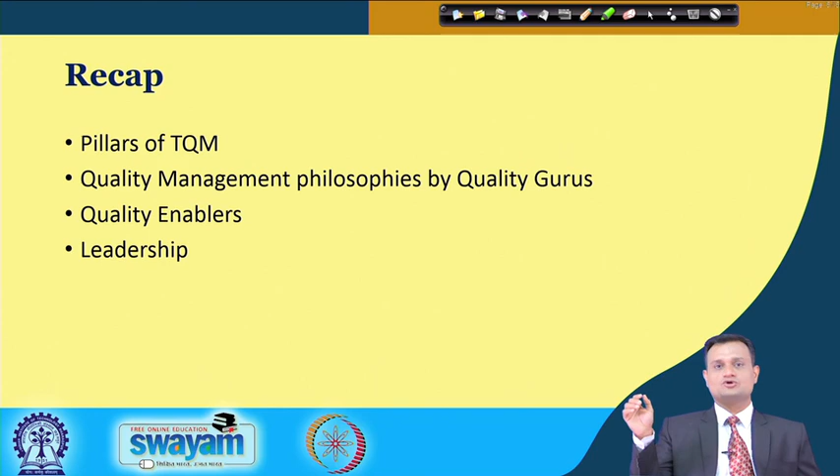Before that, let us just try to have a small recap. We have basically talked about pillars of TQM in last lecture. We have seen the quality management philosophies and principles extended by various quality gurus, quality enablers, and what is the prerequisite for implementing continuous improvement program like Six Sigma, and what is the difference between leadership and management, and how leadership at every level in the organization can play a great influential role in building the quality culture.

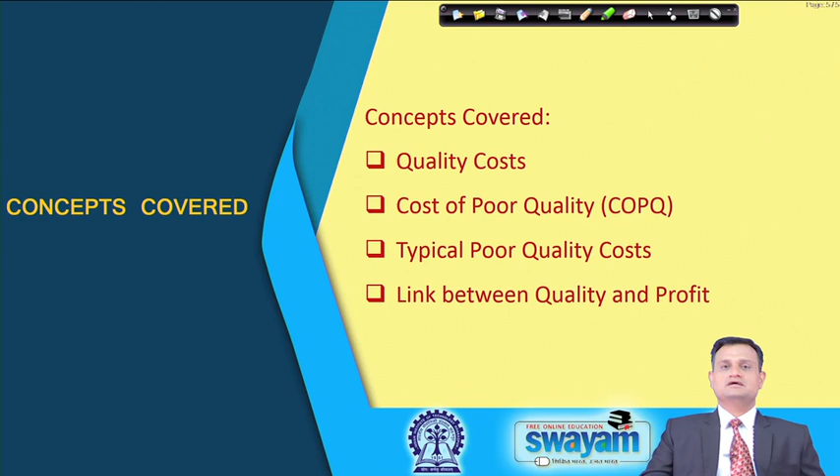So, with this let us try to continue in our journey, and this lecture will basically focus on quality cost, cost of poor quality, typical poor quality cost, and link between quality and the profit. So, these issues will help you to appreciate that any organization, service or manufacturing, by not putting their efforts for achieving the better quality, how much they are losing and what is the rupee or dollar cost associated with this.

So, to begin with, I would like to refer a very good quote given by Don Davis, president of Allen Bradley Company. He said that the driving force behind productivity today is not working faster or working cheaper, it is working together. So, this is the spirit we have seen as a part of TQM, and quality is the responsibility of everyone. It must empower the people, motivate the people to participate in a team based work and achieve the higher quality standards.

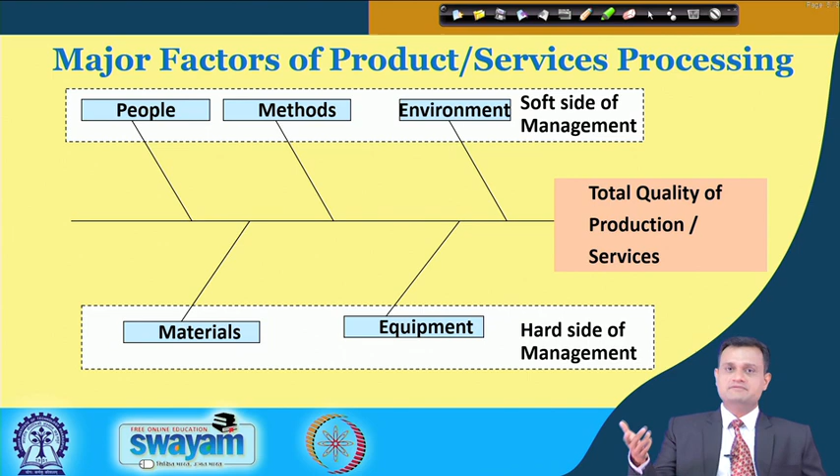Now, let us see the major factors of product and services processing, and these factors could be divided into two broad categories. Number one, soft side of the management, and another is hard side of the management. So, when you talk about total quality of product or services, you can see that environment, people and methods, this may be put together as a soft side of the management, and equipment, material, this is hard side of management. So, it is important for an organization to integrate these two in order to realize the benefit of quality in terms of cost and see that perpetual sustainable quality improvement can be implemented in the organization.

So, commitments for the organization to consistently produce conforming products. The moment you produce defective product, non-conforming product, you are basically adding the rework or scrap, and this leads to hidden factory and the cost. So, we want to achieve a desired standard product or service which meets the customer requirement and satisfaction, and for that I want to produce the conforming products. Quality is basically the conformance to requirement, not just goodness. I may be producing fantastic product, but this product does not meet the necessary requirements of the customer or market, then it is not conformance to requirement.

The requirements are often measurable, and the system of causing quality is prevention, not the appraisal. I would like to emphasize heavily on this third point, that the system of causing quality is prevention and not the appraisal. So, if you spend 1 rupee, $1 on prevention, then your appraisal cost, including your inspection correction cost, can drastically be brought down.

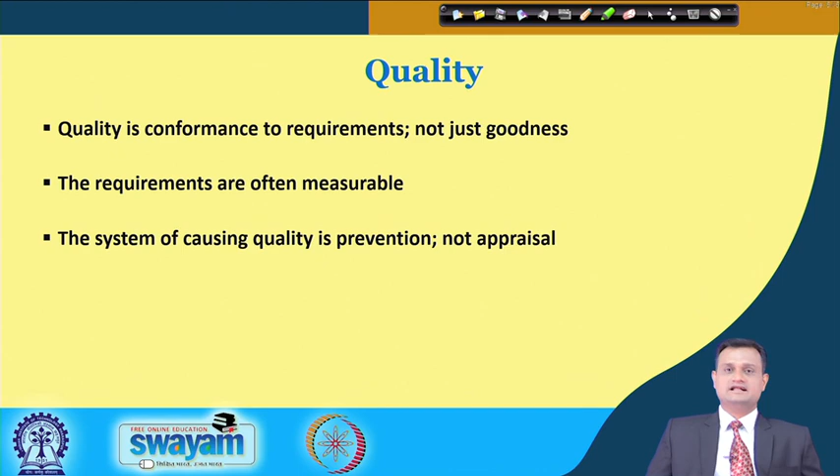So, with this let us try to see the broader categorization of quality cost. There is cost of conformance and there is cost of non-conformance. So, typically I would like to put prevention cost and the appraisal cost as a part of cost of conformance, and cost of non-conformance, it is internal failure cost as well as external failure cost. So, in the first case I am trying my best to see that I can meet the stipulated requirements, I can conform to those requirements, and in my pursuit of doing so I will have to accept prevention cost and appraisal cost. Second is cost of non-conformance. My product is non-conforming either in terms of performance or requirements, then I will have to accept the internal failure cost. This may be related to rework or scrap, and there would be external failure cost.

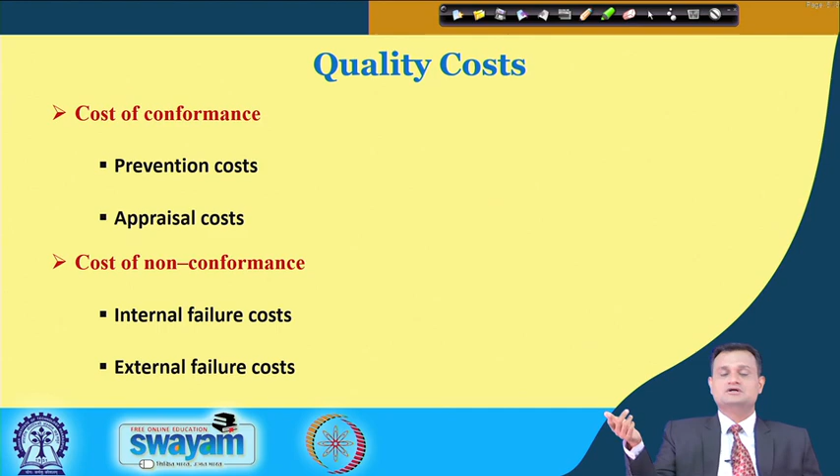So, my product is not satisfactorily performing or meeting the customer requirement when it is handed over to the customer. So, we will see the detailed classifications and the various costs we as a company will have to incur for cost of conformance as well as for cost of non-conformance.

There could be other quality costs difficult to quantify. Many a times you cannot realize how the quality not meeting the customer requirement and market is slowly and gradually damaging the company. This may be reflected in the shrinking market share, but such realization may be slow, and gradually you will see that many best organizations are thrown out from the market and their sustenance was at stake.

So, loss of customer goodwill, low company profile, reduction in market share, low workplace employee morale, these are some of the hidden intangible factors that you may not immediately realize, but gradually it will have a long term impact on the organization and your overall sustenance or profitability of the company will be at stake.

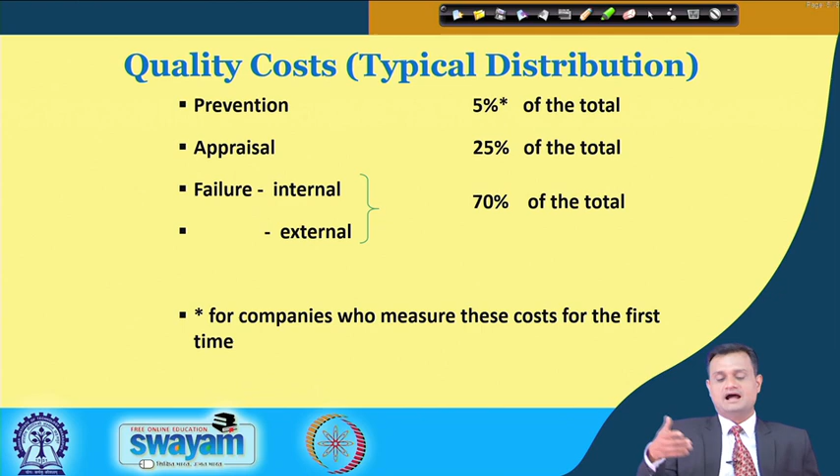So, just see this quality cost, there is a typical distribution. It may vary from company to company, but in general prevention, if you really spend wisely, is 5% of the total. For companies who measure this cost for the first time, appraisal is 25% of the total, and failure, internal or external, 70% of the total. So, in totality this is the typical distribution of your quality cost, and in order to produce conforming products, or products which can meet the customer requirement, I may spend my money on these different components.

Now, COPQ, cost of poor quality, is the expense of doing things wrong. So, here the concept is that you measure what will happen if I do not do things rightly. It means if I am not meeting the customer specifications, requirements and quality standard, what exactly damage I am accepting, and if you really measure this, you can better sensitize the top management as well as the people for achieving better quality standards.

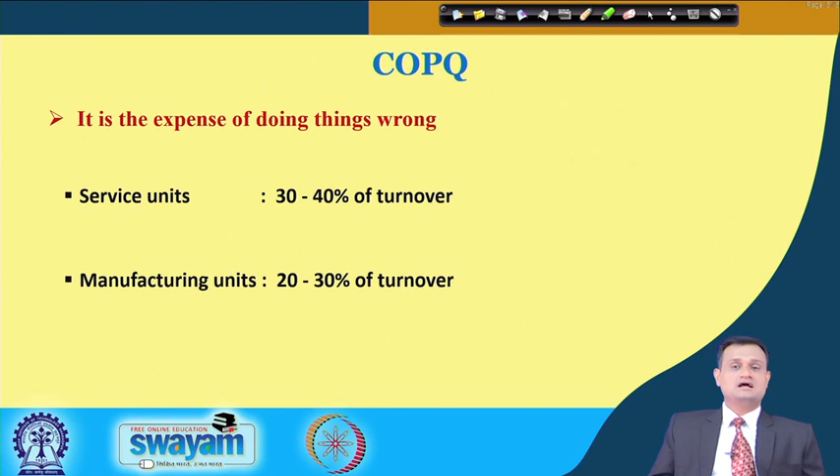So, in service units it is 30 to 40% of turnover, that is the cost of poor quality, and in manufacturing units, 20 to 30% of the turnover. If you convert it into monetary terms, you can really get sensitized to what exactly you are losing, and spending little money on training, prevention, or continuous improvement programs would be much rewarding.

So, in typical poor quality cost, there could be various types of cost within a category of prevention, appraisal and so on. So if we see the prevention cost, then job related training for employees. We are enhancing their skills and through that they are becoming more competent in executing their task. So it's a prevention cost. Their mistake level, error level will go down.

Customer interface to understand expectations. Very important. Organization and the customer should not behave as separate entities. Let there be proper marriage. Let there be proper collaboration between customer and the organization, and this interface can help the company to appreciate what to produce, what to provide and what not.

Technical manuals provide the guidelines to the people in executing their task so that they stick to certain standards, operating procedures and don't make mistakes. Early approval of product specifications. Many a times you undertake the production and still you are not final, from the client point of view or R&D point of view, about the specifications, and this is quite dangerous. So early approval of the product specifications from R&D, manufacturing and, most important, the customer can help you to realize better products and services.

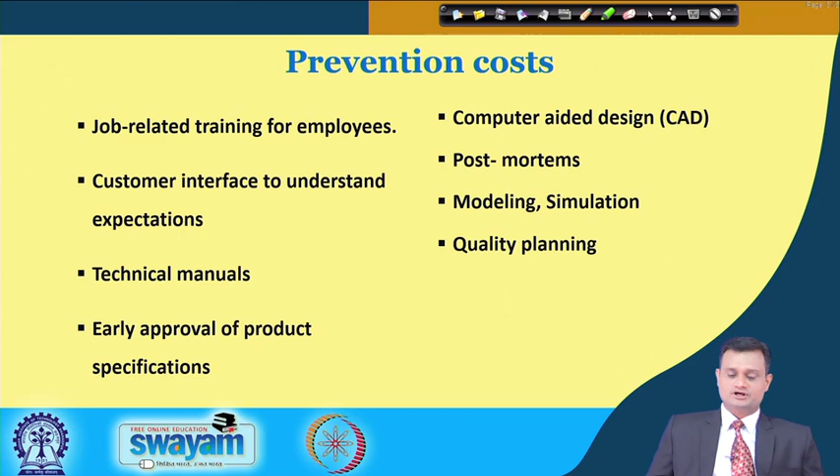Computer aided design and also simulation can save a lot of cost before you actually go for real life production. And quality planning. Another component that we may appreciate as a part of prevention cost, the most important, is preventive maintenance of equipment. So we always talk about the philosophy of total productive maintenance, TPM, and TPM emphasizes empowerment of the people for doing the maintenance of their own equipment and becoming more proactive in keeping the instruments and equipment up to the mark with better efficiency to carry out the production.

Quality systems, procedures and standards: your quality manuals must be up to date and must be properly communicated to the people so that they stick to the company wide accepted standards.

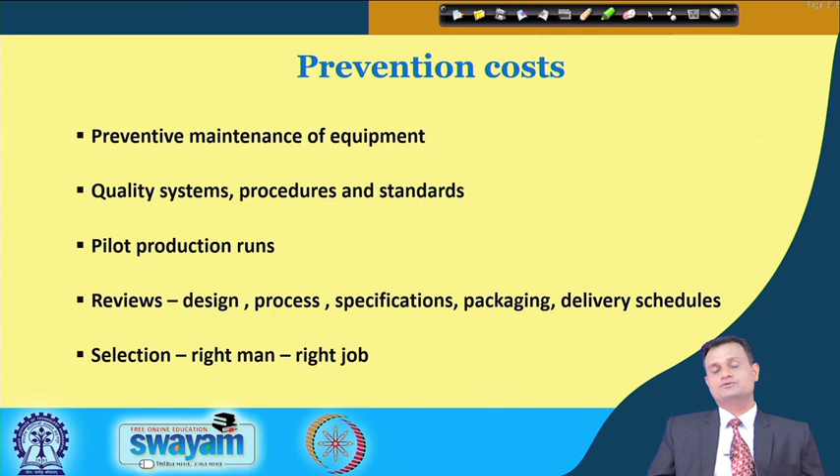Pilot production runs, reviews, design, process, specifications, packaging, selection, right man, right job. So as I mentioned in lean, the eighth waste is waste of unutilized human competence or potential, and we should try to minimize this component also.

Prevention cost, you can see there are many areas where if you just spend a little bit, you would avoid inviting many troubles later on. So surveys to detect changes in customer expectations. See, customers are exposed to a lot of products, varieties, brands, and it is extremely difficult to expect that my customer will stick to the same expectation. So in the dynamic environment, from time to time you should keep track of changing customer expectations and see how you can modify your existing product and features to meet the new customer expectations.

Process machine capability indices and studies. We will see these in detail. So many a times with aging, wear and tear and use of the equipment and machinery, their process capability has gone down, or because some parameters are disturbed it has got a little bit lower, and this study helps you take necessary action on equipment and machines to keep them up to the mark.

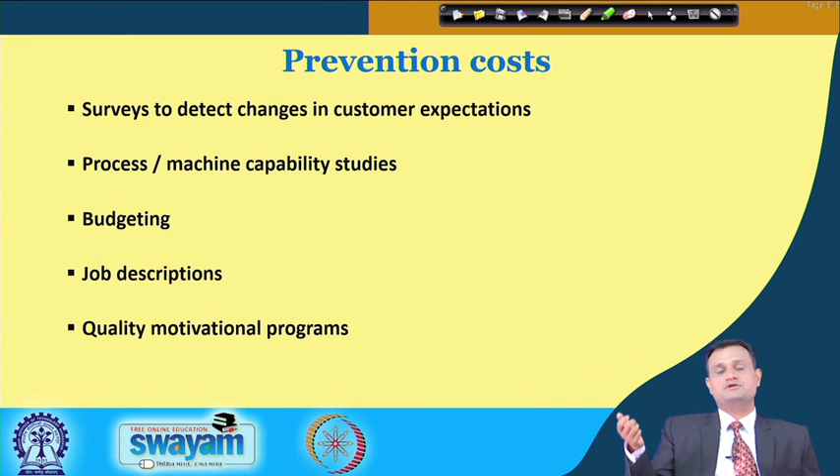Budgeting, job description and making people comfortable for their task, quality motivational programs and continuously seeking the commitment of the people. So this was a detailed list of various types of initiatives that you can take as a part of prevention.

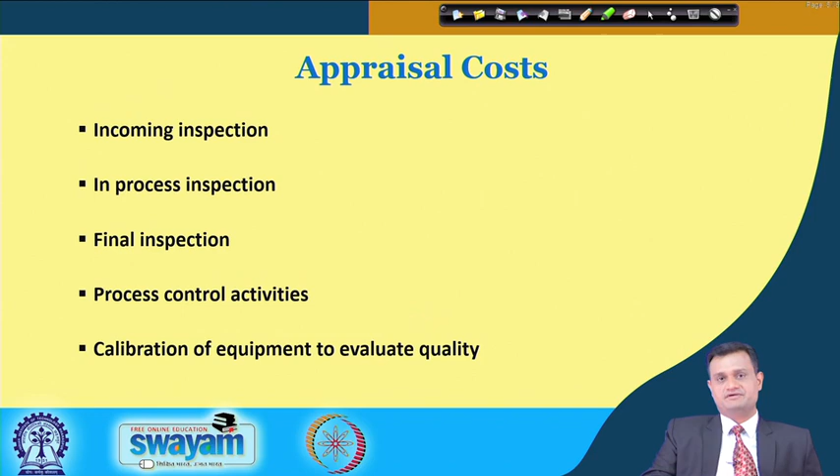Now let us see the appraisal cost. I am receiving the material, there could be incoming inspection. So remember, inspection is not bad, but inspection is a wasteful activity which does not really add any value to my product. There could be incoming inspection, in-process inspection, final inspection, process control activities like control charts and others, and calibration of equipment to evaluate quality. So there are various appraisal costs that also add to my COPQ domain, and if I spend a little bit more on prevention, then appraisal cost can be minimized.

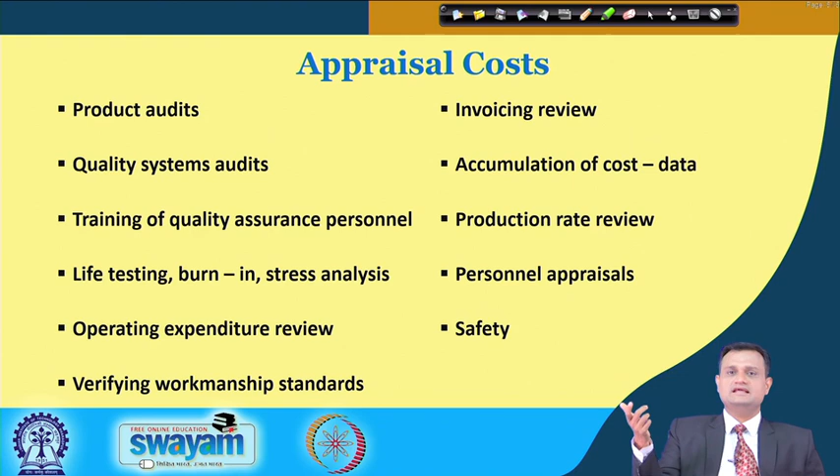So product audits, quality system audits, training of quality assurance personnel, life testing, burn-in stress analysis, operating expenditure review, invoice reviewing, personnel appraisal, then safety and so on. So mainly you will see that in the majority of the components, inspection is the central part, and either I have a little less confidence in my system or I want to be doubly sure, so I keep on adding inspection, and this really does not add much value to my products and processes.

There could be non-conforming quality cost, and that is internal failure cost. So rejection of parts in process, sudden breakdowns, higher machine downtime, oil spillage, parts dropping on the shop floor, rework, scrap, all this. As I mentioned in the previous class, there is a hidden factory, and this hidden factory needs to be addressed adequately. This is all part of your hidden factory internal failure cost.

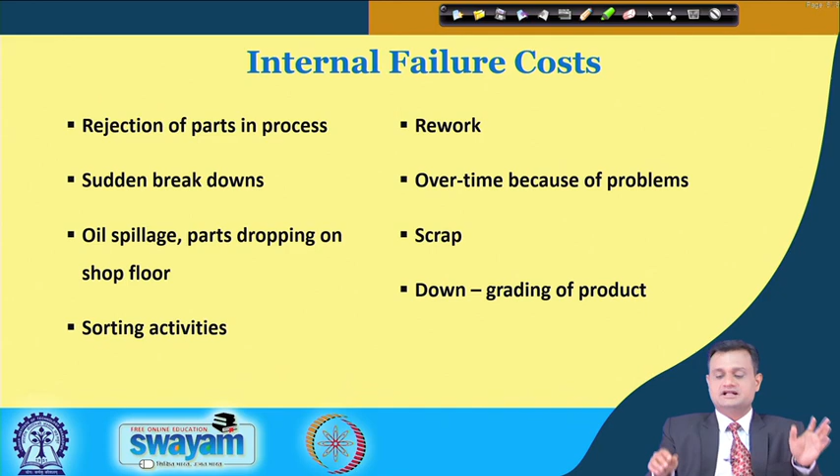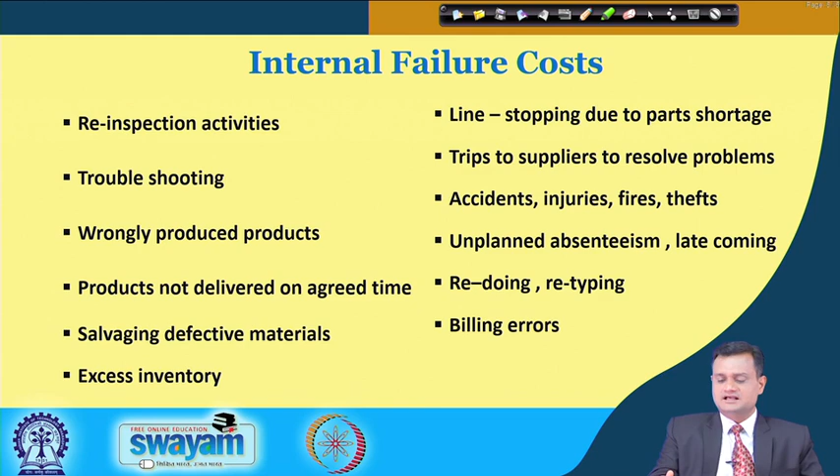You can see re-inspection activity. I am increasing the level of inspection because I am not very confident about my processes and hence the outcome. Troubleshooting, wrongly produced product, excess inventory, salvaging, billing error, line stopping due to parts shortage, redoing, retyping, and many more. So all these are part of the hidden factory, and there could be many more.

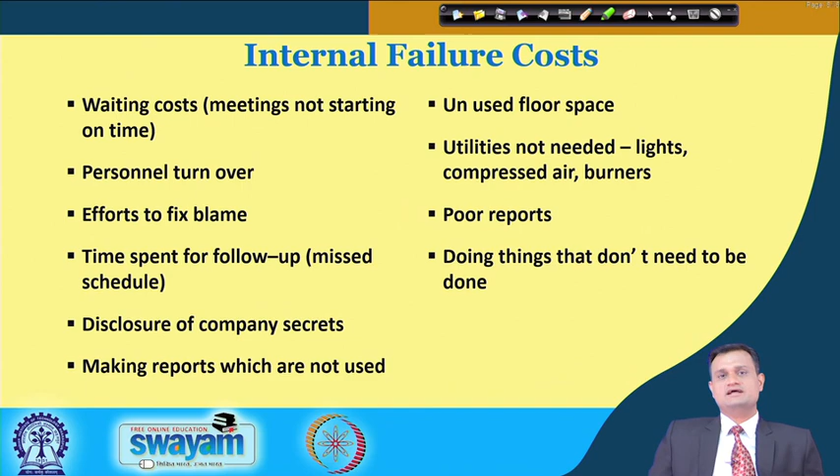So many a times we do lot many things in the factory that is actually not required, maybe too much material handling, maybe too much processing, and all this puts together and adds to my COPQ under internal failure cost.

If we see the various components of external failure cost, then you have delivered the product to the customer. Now after that, product is creating the problem, and there is a field repair center and total expenses. So you will have to visit the customer site, correct the equipment, and this is field visit related cost, correction cost. Products rejected and returned, customer is not at all happy, he is just returning the products or rejecting it, and you are bound to accept as a part of your contract with the customer.

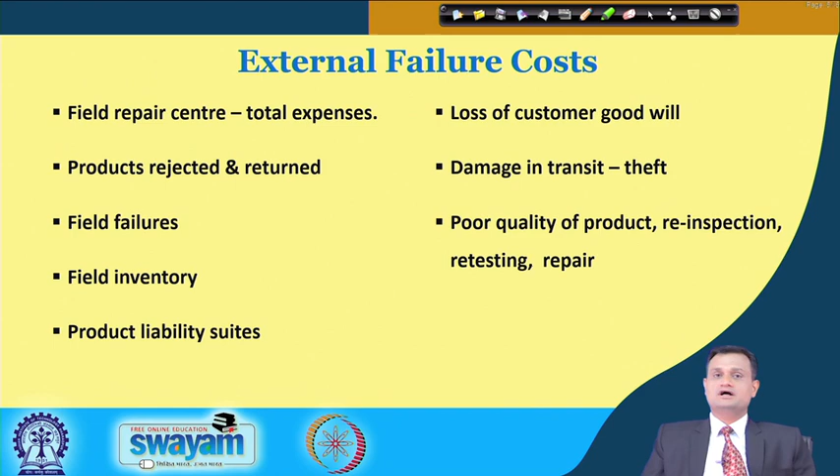Field failures, you are not able to rectify and correct the problem, and there could be, say, failure of the machine and subsequently failure of the service. Field inventory, product liability suits, legal issues, loss of customer goodwill, damage in transit or theft, your packaging is poor, or maybe the road conditions and transport is not adequate, so there could be a damage in transit, poor quality of product, re-inspection, retesting and repair.

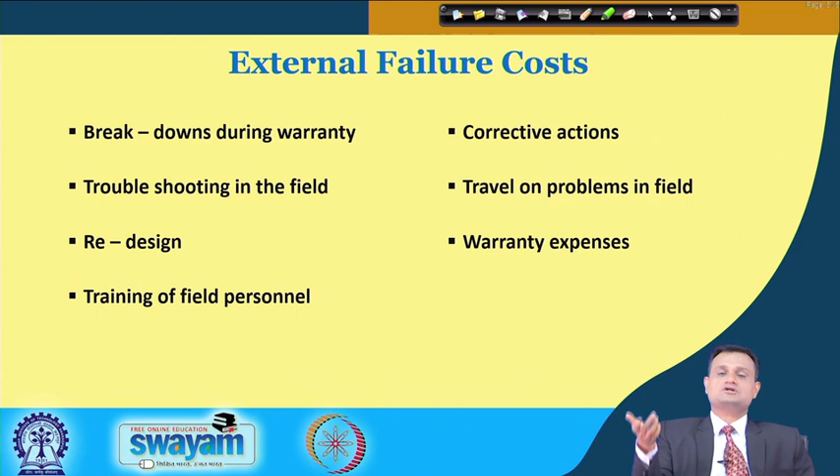There could be breakdowns during warranty, troubleshooting in the field, redesign, training of the field personnel because they are not able to handle the customer complaints, corrective action, travel on problems in field and warranty expenses. You can see that there are many areas where company they might be spending money, but it is actually not adding any value to the product or service and to the customer.

So typically if you see the example just of one particular process, let us say purchasing, and I want to understand the various cost of quality involved in terms of cost of conformance as well as in terms of cost of non-conformance. If we see the cost of conformance, proper specification drawings to vendor. If you can do this, fine. The associated administrative cost will lead to conformance to requirement and it will help me to improve upon my quality.

Vendor evaluation, review and approval. So you are installing this as a regular process and this helps your company to get better material as well as helps the vendor to improve upon their competency. Higher inventory due to difficulty in procurement, fine, this is not a positive indicator, but sometimes if the lead time variation is very high at the supplier end, then you may try to build little bit higher inventory.

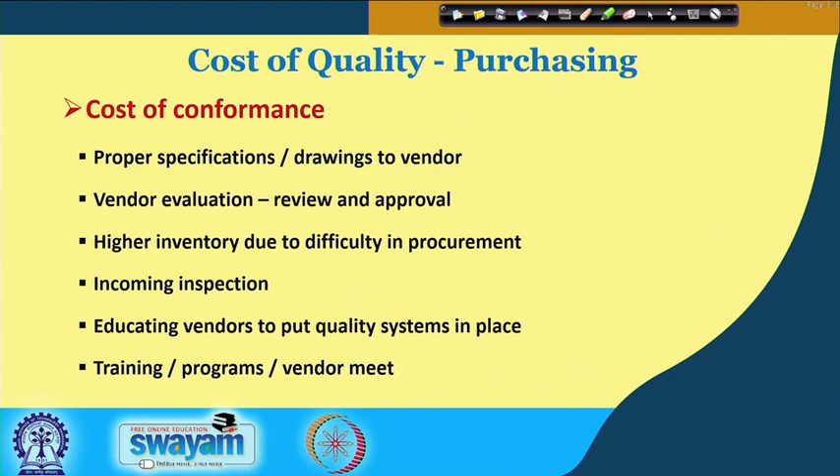Incoming inspection, many a times say we go for acceptance sampling, or if we know that my supplier is highly reliable based on the track record and the process capability is very high at supplier end, then we may accept the certificate provided by supplier and that could be good enough. Educating vendors to put quality system in place, training programs and vendor meet.

We can see the list of cost of non-conformance: purchase order not proper, rewrite, amendments. There could be incoming material rejected, sorting, rework, reinspection. You can see that here whatever I am doing, it is mainly rework. It is mainly adding inspection, adding say a duplicating kind of effort, material return cost, premium on freight, visits to supplier to solve the problems or conflicts.

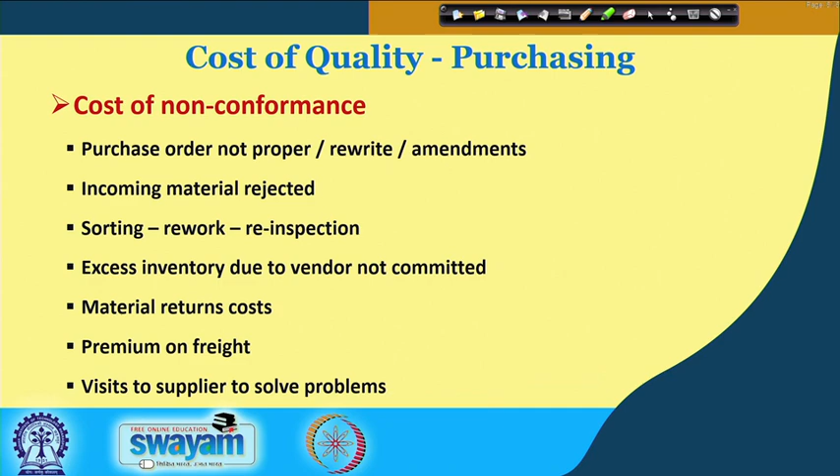So the question here is: are quality and profit linked? What is your view? Are quality and profit linked, or without bothering much about quality, I can still reap the better profits? So we have talked and seen in detail the various costs associated with the quality, and I need to really see how much I can spend a little bit on prevention so that other cost components can be minimized. So let us see. The answer is yes.

There is an evidence that high performing organizations, benchmark organizations, world class organizations, they enjoy both financial success and high rating of the customer satisfaction. So these two go together. When you have greater customer satisfaction and loyalty, automatically your business success improves. This has been verified by many consulting surveys, benchmarking exercises and increasingly popular forms of self-assessment.

Let us try to see as an example some study conducted by a well-known consulting firm, Ernst & Young, and what they discovered when 500 businesses in Canada, USA, Germany and Japan were analyzed. So there are three parameters they have considered. Number one, quality performance is low, quality performance is medium and quality performance is high. Now if we see the impact of this various quality performance on set of parameters, then let us say return on asset is less than 2%.

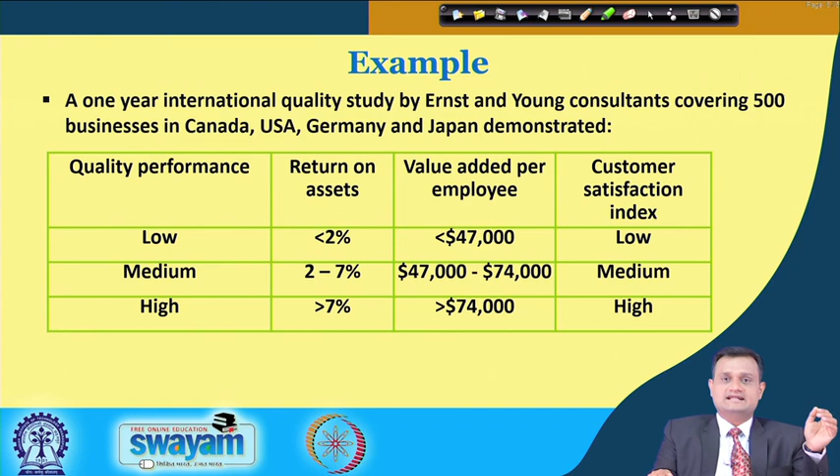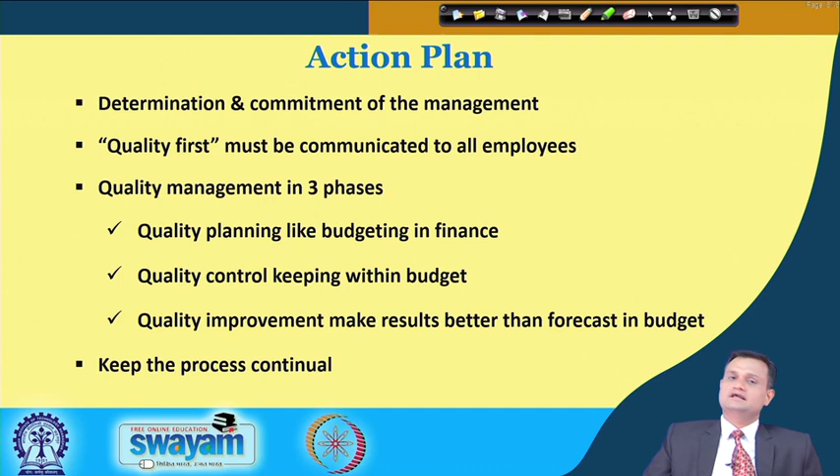So, this clearly demonstrates, yes, there is a link between quality and the performance of the organization, and we cannot ignore the importance of COPQ, cost of poor quality, and this helps the company to really get sensitized over their quality performance. So, what is the action plan? The action plan is determination and commitment of the management. Quality first must be communicated to all employees, no compromise. Quality management in 3 phases: quality planning like budgeting in finance, quality control keep within budget, and quality improvement make results better than forecast in budget and keep the process ongoing, continual.

So, finally, even if you are on the right track, you will get run over if you just sit there or move slowly. So, please understand that quality is a continuous journey, and the measures like cost of poor quality always help us to be on the right track and with the right pace in our pursuit of improving quality and meeting our internal as well as external benchmarks.

So, before I close, I want you to think over a couple of issues. I am floating here a few questions for your internal consumption and thinking. So, enlist the major factors of product and service processing. Can you outline the major factors of manufacturing a ballpoint pen, just a product? Address both hard and soft issues, and you can make use of cause and effect diagram. Compare the various poor quality costs and just try to emphasize its importance in terms of COPQ.

Outline various costs of conformance and non-conformance for a typical case of pizza delivery. So, a restaurant wants to deliver a pizza. Now, we have seen the example for purchasing. Now, for this particular process, can you identify the various costs of conformance and non-conformance? How are quality and profit linked? Give an example taking the case of a specific product of your choice. So, please give a thought over these couple of questions, and that will help you to have quick revision of the concepts we have learnt in this particular lecture.